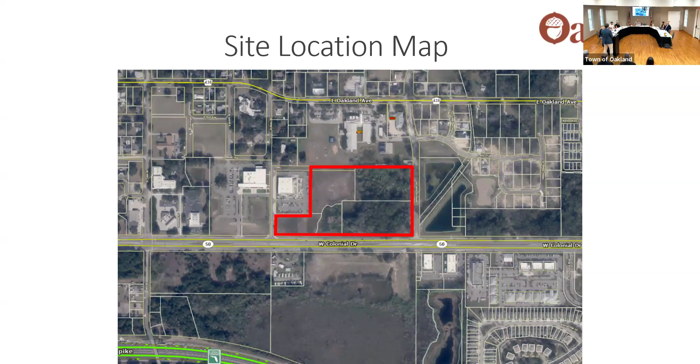Now we'll go a little bit into the actual project overview itself. The Oakland Town Center development is proposed to comprise 11 distinct commercial buildings, varying in size and configuration from a 10,000 square foot multi-tenant space all the way down to about a 1,200 square foot drive-through establishment. In total, the sum of the square footage of all these buildings is 84,020 square feet, and it would be accessed off of 5 distinct access points.

If you can see where my cursor is, 2 of those access points would be off of the existing through street in front of the Tractor Supply store, 1 directly off of State Road 50, and 2 off of Catherine Ross Road. As you'll notice here, as part of the development, the applicant is proposing to construct at their cost another access point, another roadway, which through the development agreement would be dedicated to the town as public right-of-way.

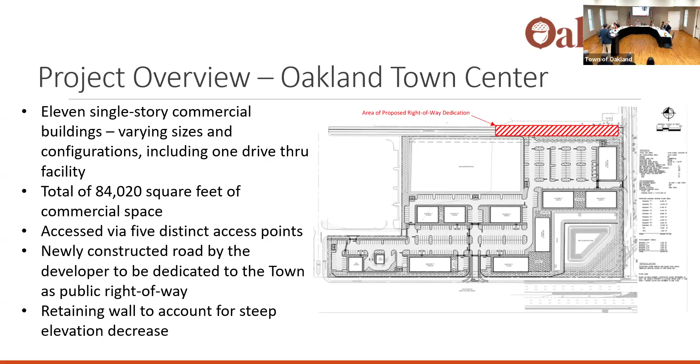The last note is that the subject site's current elevation includes a very drastic decrease from the north to the south. The engineer for the project is here and can give more background during the applicant presentation, but essentially, in order to develop the site, a lot of fill is going to have to be brought in, and the site will have to utilize a retaining wall to create an elevation suitable for developing a project of this size and magnitude. We'll go into that more once we get to the elevation portions of this project.

Here you can see the civil site plan with those 11 buildings, most of which are more of that multi-tenant commercial space, aside from these two down here. We'll see more of the distinction between the building types once we get to the actual elevations and proposed renderings of the buildings. And here, you can see this darker line, which references the retaining wall that I previously mentioned.

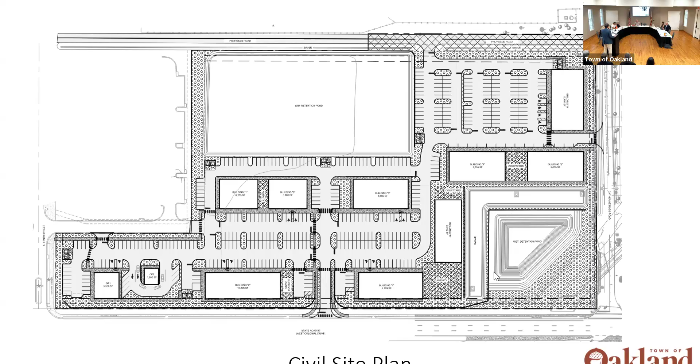Giving a little bit more greenery, if you will, to the visualization of the project, here's the proposed landscape plan. As part of what was mentioned in the introduction, both the civil plan set you saw on the last slide and the landscape plan you're looking at here all comprise the preliminary subdivision plan that is part of the item you are reviewing this evening.

I should also note that during the Appearance Review Board meeting, where this project was previously heard, the discussion among board members was whether it would be possible for the applicant to incorporate a little more landscape hedging between the commercial buildings and the school to the north. That's not reflected on this plan — it wasn't a condition of approval by the ARB, but it was part of the discussion among board members. As a follow-up, the applicant's presentation does include a revised site plan that incorporates that additional landscaping following those discussions.

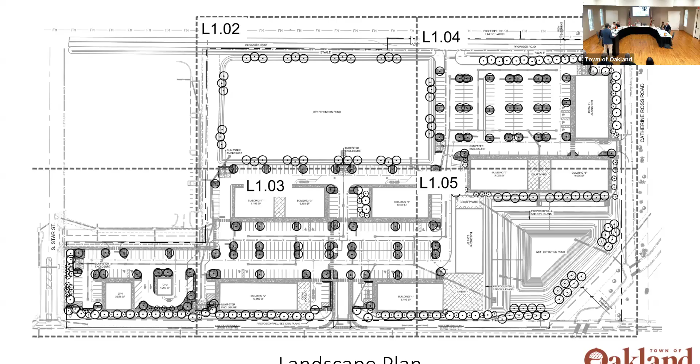So going a little more into the development agreement portion of this project: as I mentioned, in order to rezone to the PUD zoning district, there needs to be a set of guidelines or regulations outlined in the companion development agreement. Some highlights — the complete agreement is part of the agenda packet — facilitate what kind of businesses and uses are allowed on the property. As you can see, it's fairly all-encompassing: commercial, retail, office, restaurant, with only one drive-through allowed as an important caveat — the maximum is one drive-through under this PUD development agreement — plus educational and clinic uses. So it provides a wide range of potential options for these buildings.

However, there are also restrictions on what cannot go into those buildings, including smoke and tobacco shops and marijuana dispensary facilities. Those are explicitly prohibited per the language of the development agreement.

Within are also specific terms and variations from the traditional standards of the Land Development Code that were negotiated as part of creating the development agreement. As an example, some standards include a maximum width of commercial buildings along State Road 50 of 240 feet, just to maximize the frontage and create a full commercial store frontage along the primary roadway adjacent to the property.

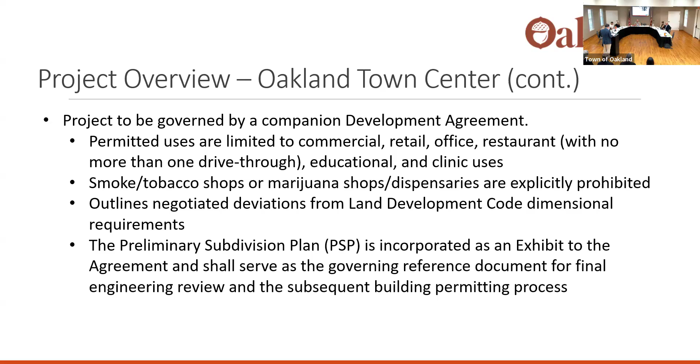As part of their role, the Appearance Review Board has the ability to make specific recommendations and dimensional variances to the town's design district requirements, special exceptions, or variances. The ARB's job, before whom the project was heard a couple of weeks ago, is to review the proposals to ensure these variations don't take away from the intent and purpose of the particular design district in which the property and project is located. As part of this process, now coming before you for review as well, the applicant group provided a specific list of several variances that were reviewed and considered by the ARB.

So here's a brief outline. There's a little bit more in your agenda packets, but here's the overall breakdown.

First, with commercial building fenestration, the town's land development code requires that commercial buildings contain 60% building fenestration, fenestration being a measure of openings in a building: doors, windows, and so on.

The applicant group did provide an alternate measure of calculations, and the architect is here to speak on it a bit more during their portion. Basically, the key consideration is the large retaining wall that has to be put into place in order to build this property as shown in the site plan.

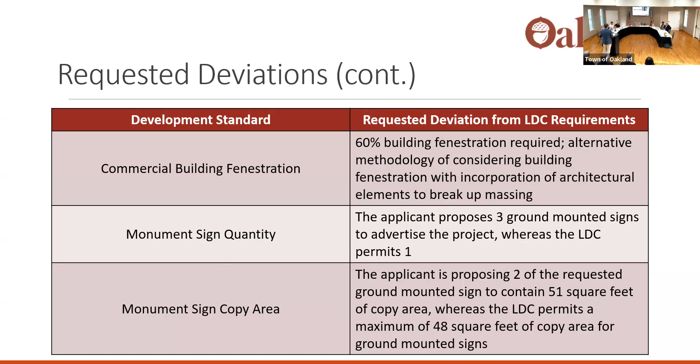So now I'll go through these fairly quickly — the next batch of slides are the proposed building elevations. I provided a key on each one so you can see where in relation to the overall site plan this building is proposed to be located.

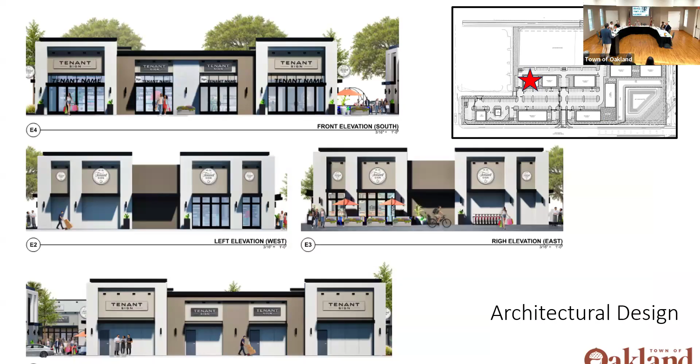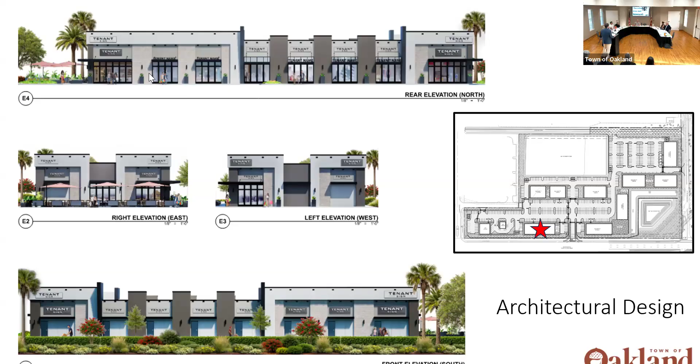This building you see here is one of the ones fronting State Road 50. As you can see, these would essentially be the back of house for the commercial buildings, but still maintain texturing, breaking up of architectural features, and gradations in coloring, creating visually appealing buildings while having the primary fenestration facing the interior of the site.

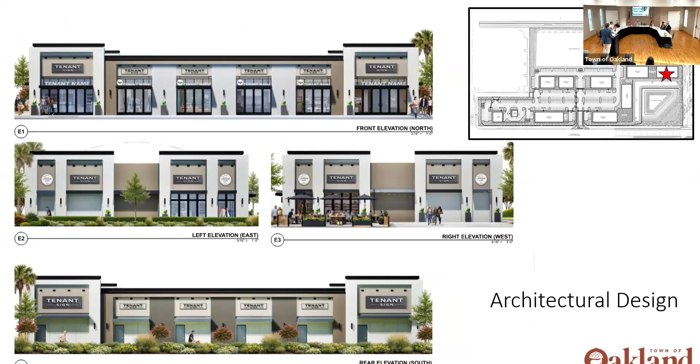Here you can see another building more to the interior. Here's the other primary building fronting State Road 50. This building has its side profile directly facing Catherine Ross Road, whereas this other building has the primary frontage along Catherine Ross Road.

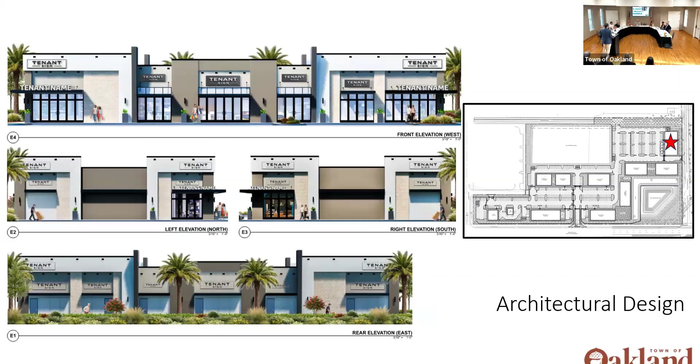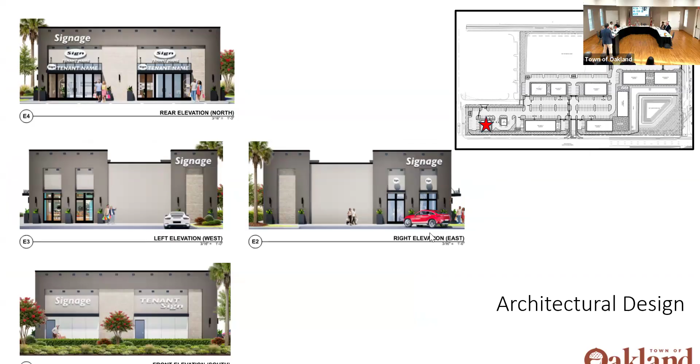For the last two, these are the most different of the group — the smallest of the commercial buildings proposed. This one is a multi-tenant, two-tenant building, conducive to restaurants or smaller shops. Lastly, as mentioned, the development agreement allows a maximum of one drive-through facility, and this is the proposed rendering for that one drive-through facility.

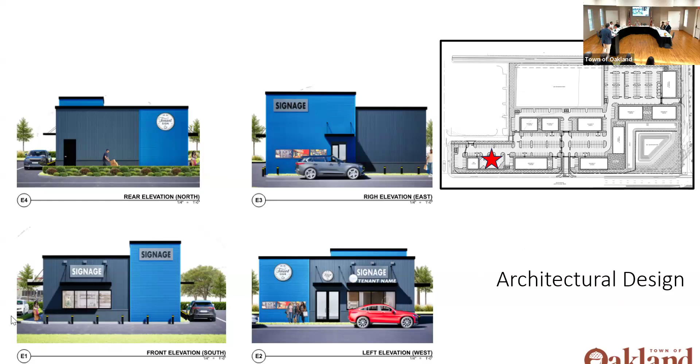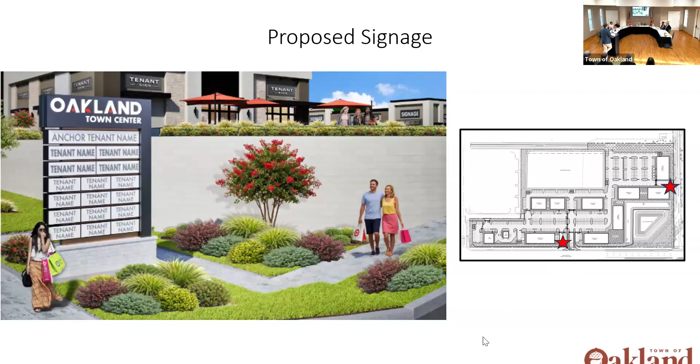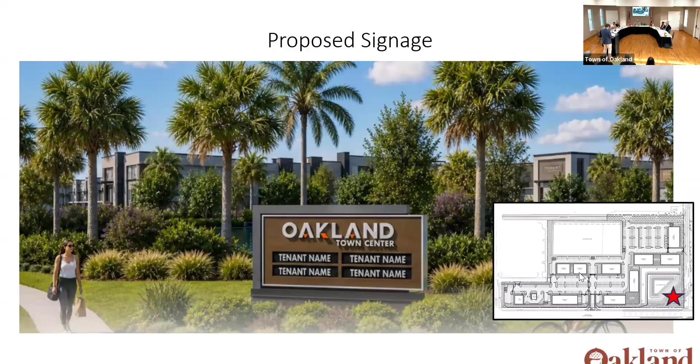Going into the staff analysis, this project site is located within the town's urban corridor design district, the intent and purpose of which is to accommodate larger mixed-use types of projects along major commercial corridors. Through our analysis, staff found the development consistent with the design district's purpose of supporting higher intensity commercial uses with local and regional accessibility along major transportation corridors.

The project would also help facilitate the redevelopment of an underutilized vacant piece of land along a major transportation corridor, and could promote economic investment and support job creation within the town, which staff concurred was the intent and purpose of the urban corridor design district.

As mentioned, this property was reviewed by the town's Appearance Review Board at their August 4th meeting. Through staff discussion and post-presentation, the ARB unanimously recommended approval of the project as presented before both them and you here as the Planning and Zoning Board this evening.

With that said, staff finds the proposed Oakland Town Center substantially compliant with the town's LDC design district requirements, and recommends approval of ordinance 2026-05 as presented.

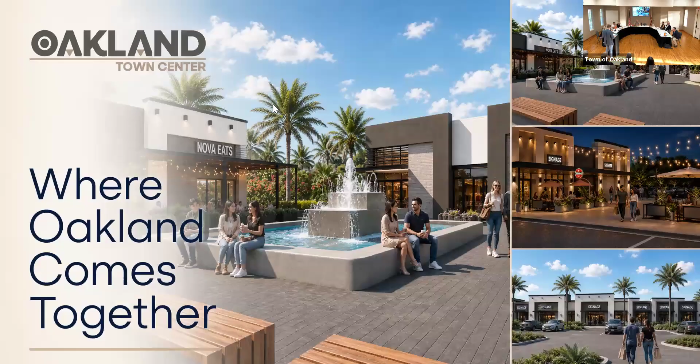Before I dive in, I want to bring up Alex to introduce himself and talk about the project team we were able to fill the room with tonight. First, I want to thank each one of you for allowing us to potentially do this project here. It's a real honor. This project has been a long time in the making. There was a period where we didn't think we'd be able to feasibly do this project because of the engineering and site work it entails. It's quite expensive. Highway 50 has gained a lot of momentum in this area over the last 5 or 10 years, which now makes a project like this feasible.

We envision Oakland Town Center to be an incredible, vibrant center that is cozy. You'll see it's raised up a little bit from Highway 50, which at first, when I saw this visual, you might think, what is this? Because it is kind of an odd thing. What I've come away with is it gives it a real private feel, separates it from Highway 50, and raises it up. It's nice, it's safe, it's very pedestrian friendly.

We picture a lot of cafes and restaurants here, things of this nature, which you'll see in the presentation today. To bring this together, we've had Kimley Horn, who I think you guys use for your own projects, who's been instrumental in this. Obviously we have Logan and Tara who've helped us immensely, Costel who is part of our architecture team, and Alexi who's helping us lease this product — she can give you insights into the tenants we've seen interest in, and I think it bodes well for Oakland. I love Oakland. Steve Healy is a good friend of mine who does projects here, and we talk about what this can be for not just the town, but for Orlando. We want to make this a feature of something. It's very important for us to execute on this and do a great job. Thank you all for hearing our presentation today.

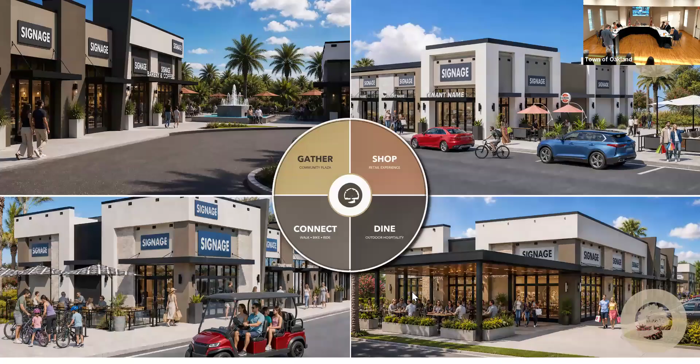I want to offer you some visual representations of what's going in here. The Oakland Town Center, I think, is something uniquely Oakland, and it's in a place that welcomes residents and visitors really to the gates of the town. You'll see throughout these conceptual renderings that the way the project is organized and lined up allows for a unique feel, and as Alex put it, I like the word cozy as well. So you have a variety of uses within the PUD.

I want to address this too: there's a number of items before you in the ordinance that you're making a recommendation on tonight. This is far from shooting from the hip — I really commend and thank your staff and all of their consultants for all the back and forth. The result is a PUD development agreement and preliminary site plan that can achieve the goals we're showing you visually tonight.

Ordinarily when I'm before jurisdictions talking about a planned unit development, we don't need to separately talk about deviations. Planned unit development zoning designation is a negotiated zoning district in which you're able to achieve things like what you want to see here and what design criteria is going to make this look good in the town. But I appreciate that we're able to call out the specific requests so we can cover everything in detail, and that's the fenestration.

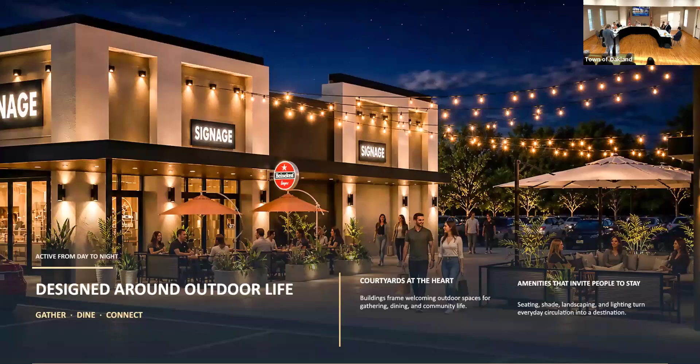I want to talk about the design - this is something that's inviting, right? The lighting features, you saw some of the water features in this courtyard feel. Not this string of buildings, but something that breaks up the overall project design and allows people to traverse the property and see all the different tenants and enjoy their stay at the town center. Roll to the next slide.

So we talked about the signs, and I'm happy to answer specifics on these as well. But the three I think are functional as well as attractive, and you see in all these renderings pretty significant landscaping, and that landscape plan is going to ultimately be part of the development agreement and the PUD ordinance as well - focusing on wayfinding, functionality, and being welcoming signage to the town and to the project as a whole.

We had some great discussion at ARB, a lot of which dealt with the overall site design and some of the things I was able to address in this presentation, and the landscaping. We've been able to provide additional landscaping, specifically where the comment was raised regarding the educational facility to the north. The landscaping also really assists with the topo - as you know, this is a pretty significant slope here, so we need a retaining wall. We've been working in depth with FDEP and other jurisdictions to achieve this project, and the landscaping serves a functional purpose but is also really aesthetically pleasing.

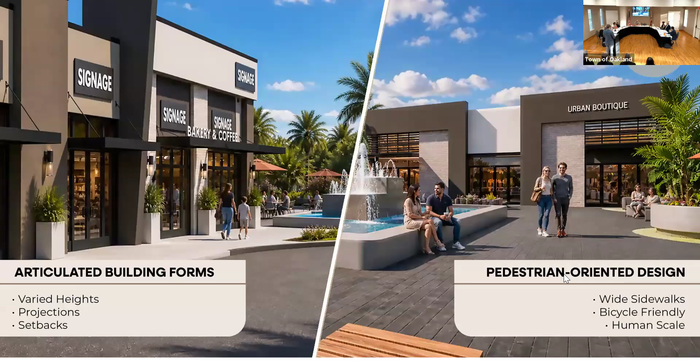I've hit this in all my previous slides, but the pedestrian-oriented design is one of the main takeaways here. We talked a little about pedestrian safety in the ARB, site circulation for traffic and for bicycles, and how it lays out. Also, as I've said a couple times, it's not just this big long wall of bays for tenants - the way this is laid out also allows for pedestrian safety, breaking up vehicle speeds within the project. Those courtyards and the overall design layout are focused on pedestrians and bicycles.

So the landscaping plan has been amended slightly to accommodate some of the great comments we received from ARB, adding additional landscaping. This is in addition to the renderings you've seen, to help break up some of the change in elevation as well.

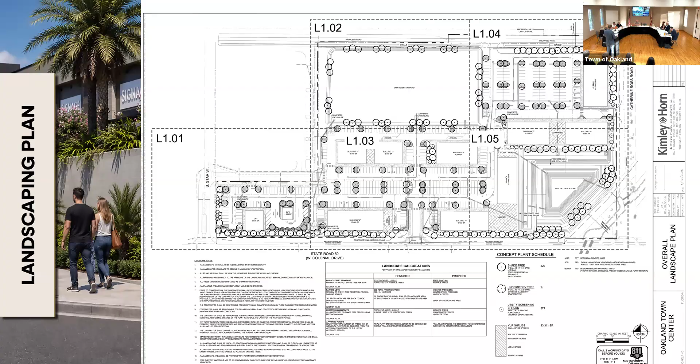Thanks, I have a few. Is that okay? Please, okay.

The sign that you state is going to be on the smaller sign on the corner at the entrance to Tractor Supply. There's already a sign in the median in front of Tractor Supply, and you stated the sign would be where people driving west would see it. What about people coming east? Is it going to be a V sign so people going east can also see it on the left?

Yeah, I think this visual is also helpful up on the screen. The Tractor Supply is there, kind of in the left hand, blank area. So yes, the way the smaller sign is laid out, it does face slightly to the east, so that people coming west can see it, but it's also laid out so that other people can see it. To answer the heart of your question, the middle signage to the south is also designed so that both sides can see the signage and the tenant offerings that are there.

Okay, and the tenant names - many of the signs around everywhere have those tenant signs, and after a couple years they become incorrect. They don't remove a tenant that's left, or don't add a new tenant. Are they going to be digital, or will they be manually replaced?